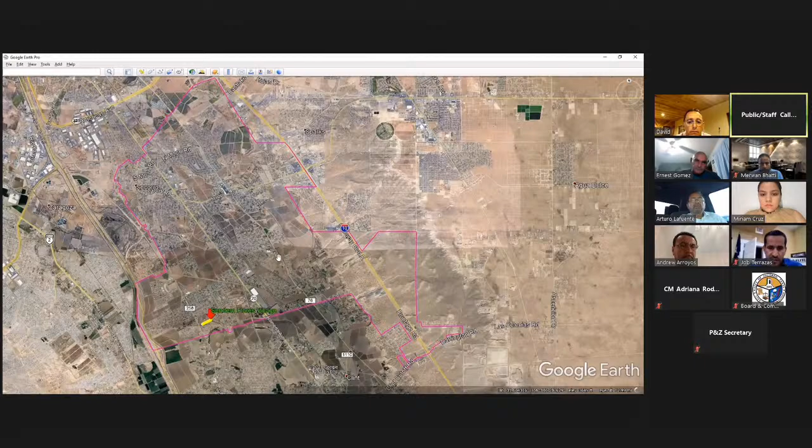Good afternoon, Commissioners. This is an application for a new subdivision. It's going to be called Sendero Flores Village. This property is located off of Socorro Road. This subdivision had already been presented to you before, but when this item arrived to council, it got denied because of some technical issues. The problem has been solved by the engineer.

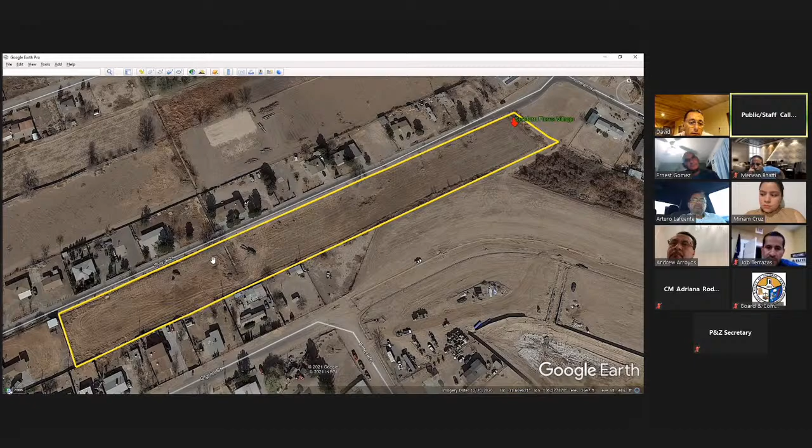The problem that we had with this subdivision was there was an irrigation ditch in the middle, and it was going to prevent the flow of stormwater into the ponding area. This subdivision will have 15 lots. They're all classified R1, and it's going to have a ponding area that was shifted over to the side. I'm going to show it to you here in just a little bit. It has a total of 4 acres, about 174,240 square feet, and it's owned by Raul Flores.

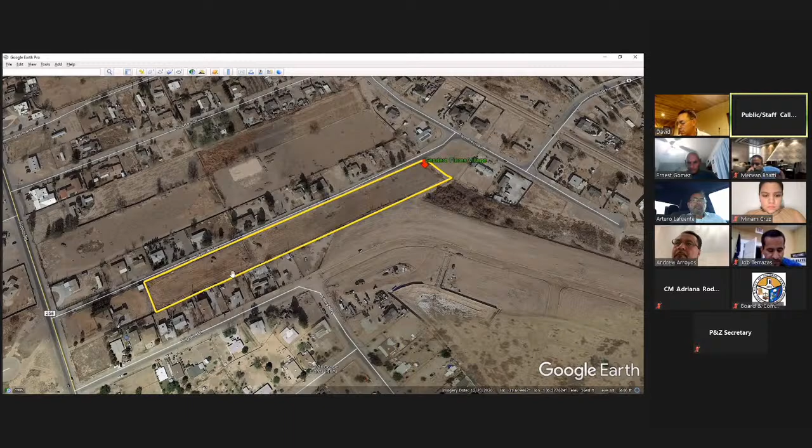According to the flood insurance maps, this is located in Zone X. Some of the reports that are pending are the soils analysis, schedule of the development, covenants and restrictions, and a traffic impact analysis. This is the preliminary plat.

The first time that they presented this subdivision, the ponding area was more towards the middle of the subdivision. Now, as you can see, the pond got shifted over to the left. These little arrows that you see here indicate how the flow of stormwater is going to reach the pond. Because of the height of the street, the developer is going to install a culvert underground. There's going to be an inlet approximately where you see the letter A, and then it's going to go underground and flow right into the pond. That was the main concern that we had on the previous request.

So with the problem solved, the Planning and Zoning Department recommends approval of this preliminary plat. I don't know if you have any questions.

Mr. Terrazas, that canal, that's gonna be deleted, I'm assuming. That's been cleared with the WID also, right? I'm sorry, I couldn't understand the question. Oh, that little canal, it's been cleared by the WID for it to go away, right?

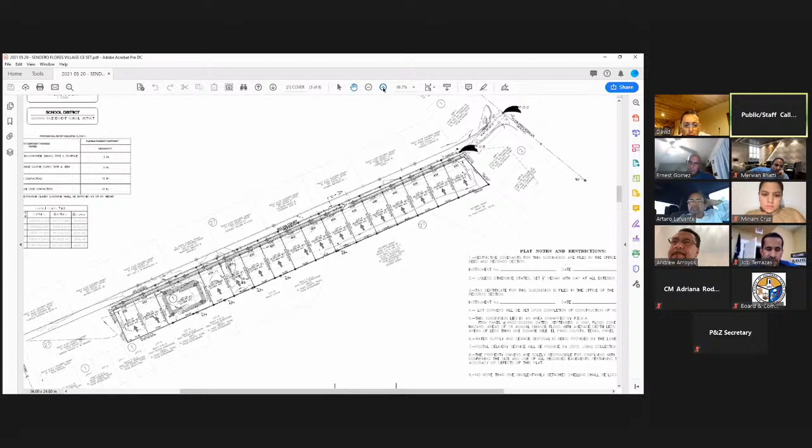Yes, yes. So the irrigation ditch that was interfering here in the path - the other thing I forgot to mention is we did get a document from the owner stating that this little ditch used to provide irrigation water to the property at the corner of Socorro Road and Sylvia. The owner of this property relinquished the water rights. We got a copy of the documents where he doesn't need the water rights anymore, so they're gonna eliminate the entire canal. For that reason, this little culvert that was crossing under Sylvia Court is not gonna be an issue anymore. They're gonna eliminate it completely.

I don't have any more questions.

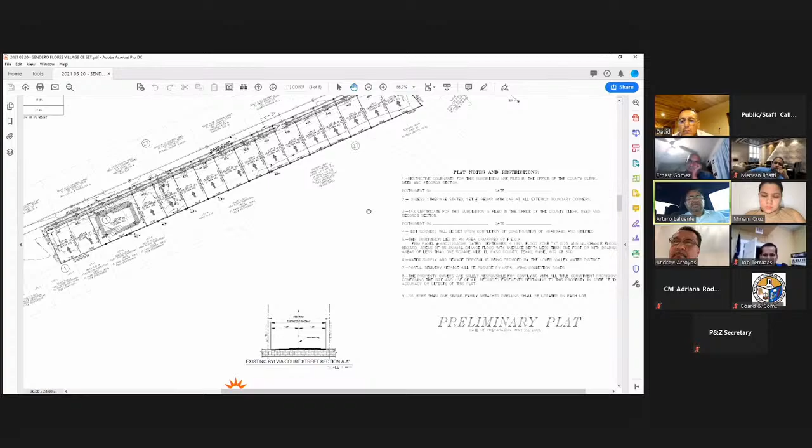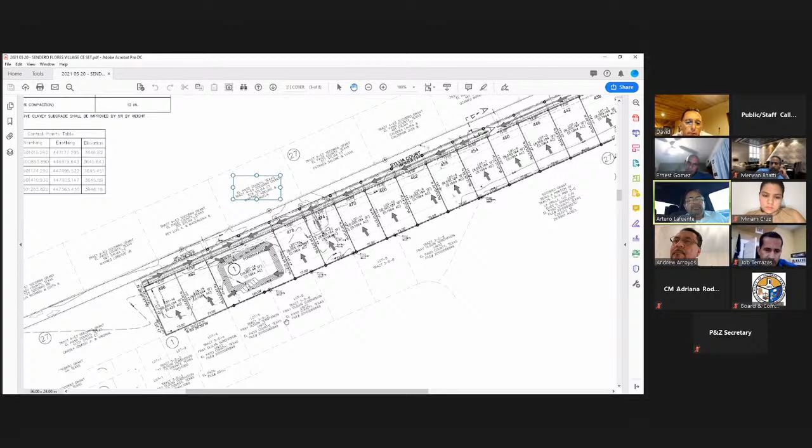So, question, Mr. Terrazas. By the ponding area, you said that it's passing in the land of the ponding area, also on the lot? Between the ponding area and the street, is there a ditch, right? You mean this little area here? No - is there gonna be, by the ponding area of the subdivision, in between the street and the ponding area, a ditch passing through?

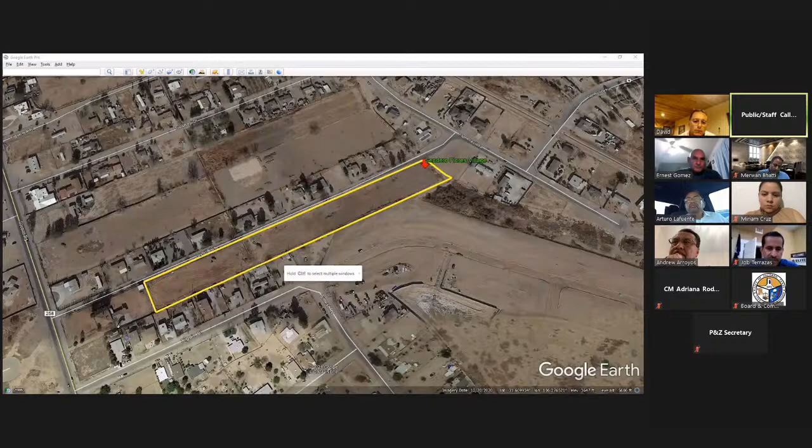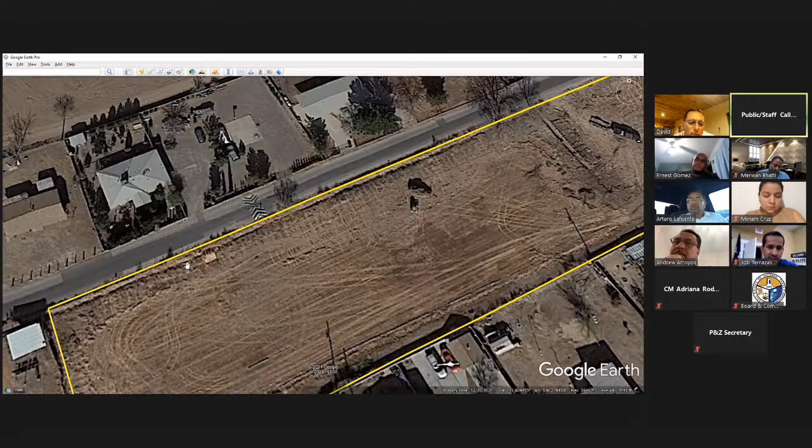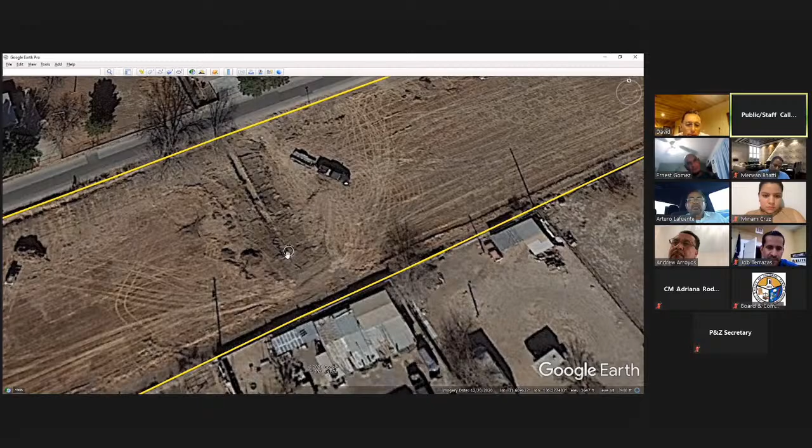The ditch is - let me show you with the aerial screen. So the ditch that was there is this one right here. It's right on the side of the asphalt, and it's gonna be completely covered. The culvert that was crossing under the street is right here, and it used to extend all the way to 3/4 of the property. The whole thing is gonna be eliminated.

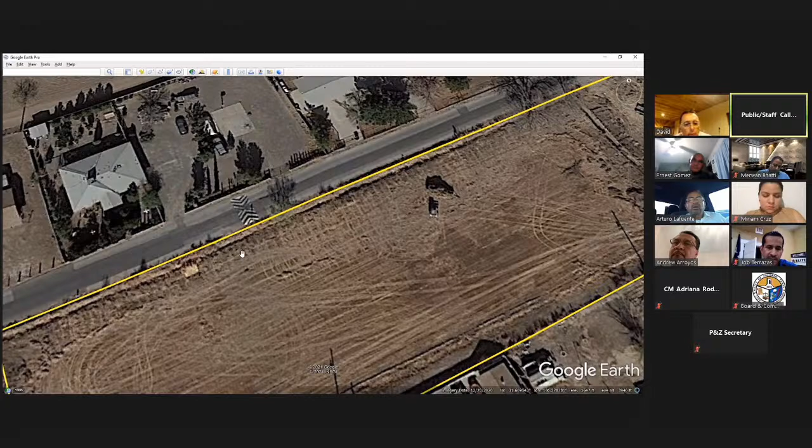So the ponding area you saw is gonna be about 15 feet away from this yellow line in this property. It's gonna be surrounded by a rock wall. And then on the side, it's gonna have a sidewalk and a swale.

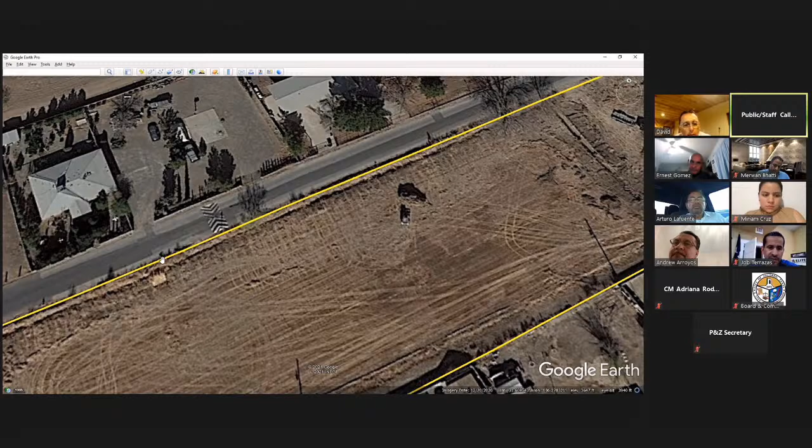And at some point, it's gonna have an inlet. I'm gonna put it on the screen one more time. So approximately in this location, there's gonna be a drop inlet where the stormwater is gonna flow into the pond. There's gonna be another inlet over here. Is there only gonna be 2 inlets total, Mr. Terrazas?

I'm sorry, I didn't get the question. Are there only gonna be 2 inlets total? Yes. And the reason for that is because right here, approximately where you see the cursor, this is a high point. So the inlet that they're gonna put on this side is gonna capture the water from the lowest point. And the inlet that's gonna be on the other side of the high point is gonna capture the water from the other side of the high point.

I think I saw a speed hump somewhere on the aerial. Is that not gonna cause an issue? No, it's not, because the speed hump is only covering the area that is paved. The swale is gonna be on the outside of the pavement, yes.

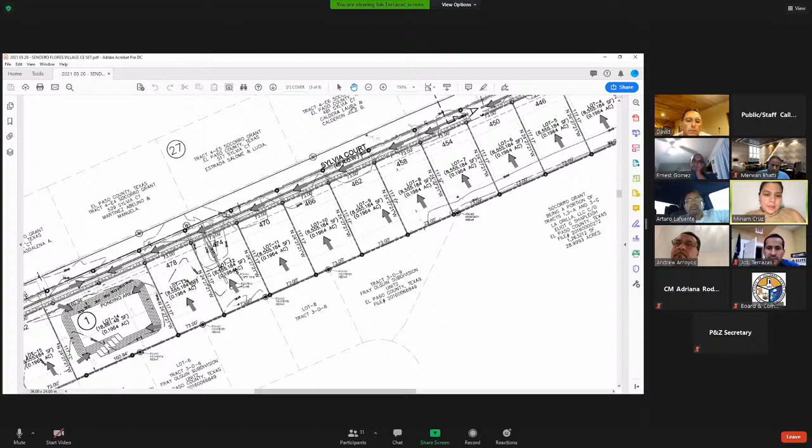I have another question. All houses are gonna be facing - oh, you took off this, what I was looking at - they're gonna be facing Sylvia Court. Yes, that's correct. And do we know what type of style of homes this builder has built before, or what he plans to build? No, we don't have that information.

I think I had one other question. Let me see. I'm sorry, can you put that back? I was going off of that because the one I have on the backup is a little blurry when I zoom in. Thank you.

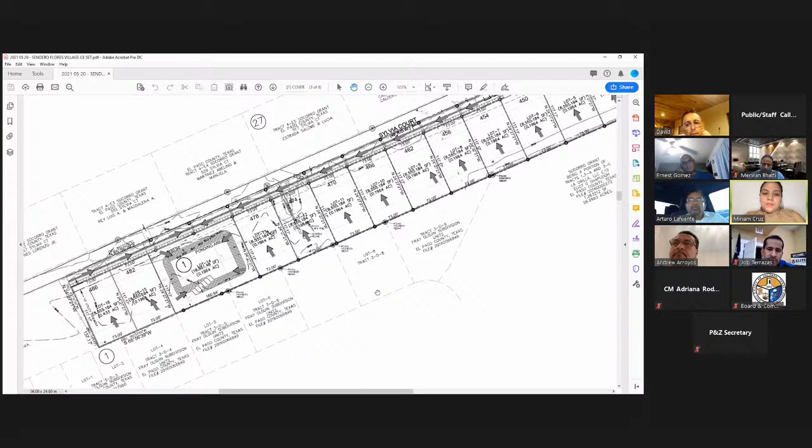I know what I was gonna ask. So these are all requesting R1 zoning, and I have 2 questions. One is, they're gonna cover up - the lot 474, or the number where I see 474, where the irrigation used to be - do we have ordinances that apply to how they're supposed to cover it up, or how they go about disposing of that, since obviously it's been there for a while? Or is that covered by something else in their engineering guidelines that they need to follow?

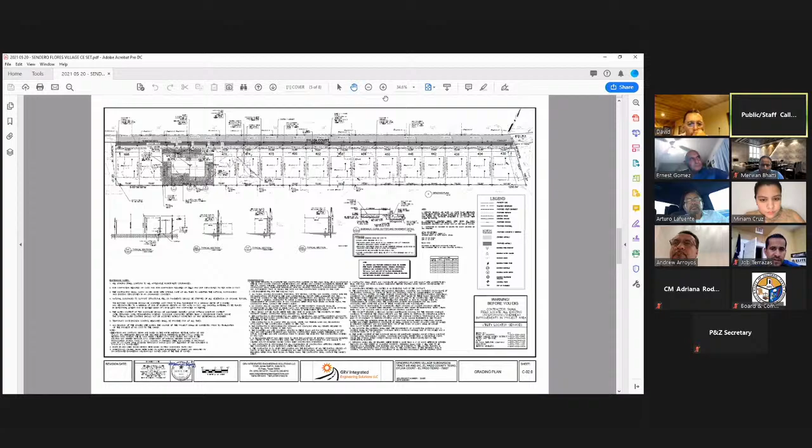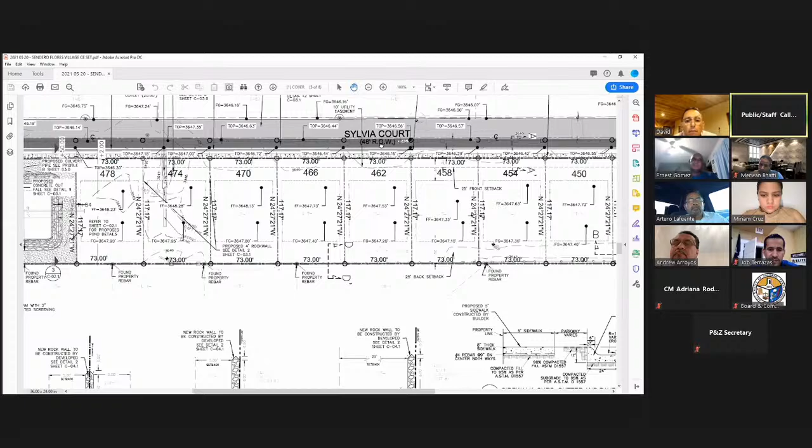That is correct, we don't have an ordinance that says how it's supposed to be covered. It's handled by the engineer's judgment. So that's why we have these improvement plans that they provided to us, where they're showing all the details of the infrastructure they're gonna be putting in. Right here, I don't know if you can see it - there's this faint gray line that you see here. This is the actual culvert that they're showing, and it's gonna end right here at this point where it's gonna flow right into the pond. So as you can see, this is where the first inlet is gonna start, and then the culvert is gonna flow into the pond according to - let me go to the next page.

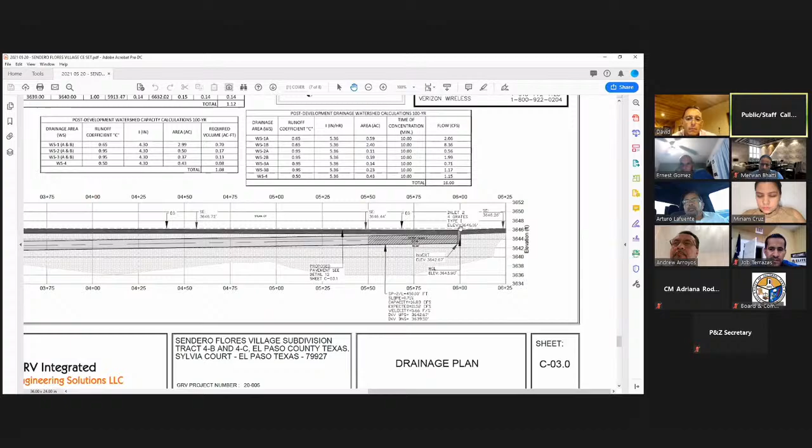This is the slope of the culvert. This is going to be the first inlet on the right hand, then it's going to go underground. As you can see, the slope is substantial, and it's going to reach the low point where it's going to flow right into the pond.

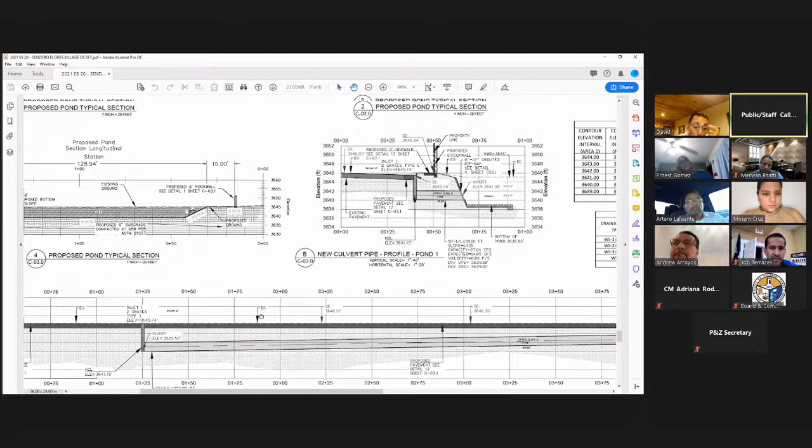This little section that you see here on the side is going to be the second inlet, the one we saw on the left. This is where it's going to flow from this point into the ponding area. So with that said, both sides of the high point are covered.

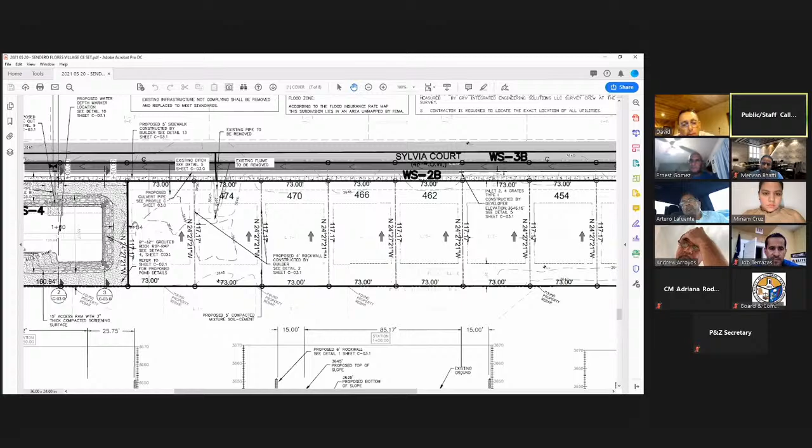And then you said sidewalk will be included as well as a rock wall around the pond? Yes, the only sidewalk that the developer will have to provide is the little section that abuts the ponding area. The other ones will be installed by the builders when they start building the homes. The reason for that is because the sidewalk is the very last thing that is supposed to be installed, because when the homes are under construction, they break.

There's heavy trucks going in and out of the property. Welcome, and thank you. If you are the host, press star now. Otherwise, please announce yourself.

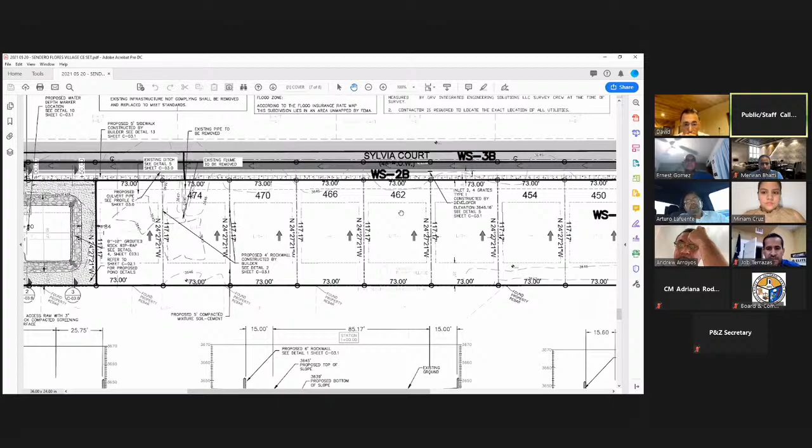The sidewalk is the very last part of the infrastructure that is usually required to be installed, just to protect it from damage. Okay, thank you for answering my questions, Mr. Terrazas. Sure.

I'd like to make a motion to approve. Do I have a second? A second. I have a motion made by Mr. Arroyos to approve, seconded by Mr. Estrada. Motion. Now I would like to take your votes. Andrew Arroyos, yes ma'am. Enrique Cisneros is absent. Ernest Gomez, yes. David Estrada, yes. Arturo Lafuente, yes. Julie Dominguez is absent. Miriam Cruz, yes. Motion carried.

Item number 6, Planning and Zoning Department report. Don't have anything to report today.

I'm sorry, item number 6, Planning and Zoning Commissioners report. We don't have nothing to report on my behalf. I don't have anything either.